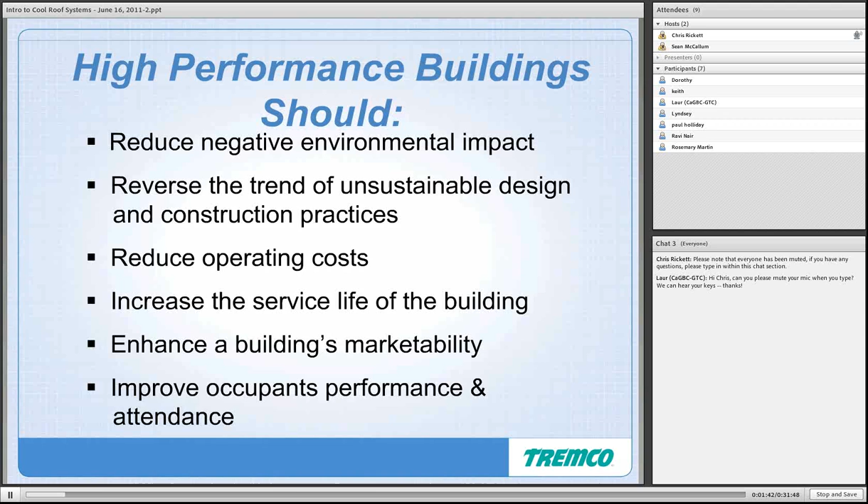So we're talking about high-performance buildings. What should a high-performance building do? High-performance buildings should reduce negative environmental impact, reverse the trend of unsustainable design and construction practices, reduce operating costs, increase the service life of the building, enhance the building's marketability, and improve occupants' performance and attendance. That's what we're looking to achieve when we try to make a building a high-performance building.

Again, talking about the high-performance building, these are some of the elements of the building envelope we try to address when transforming a building into a high-performance building: HVAC, air control and interior air movement systems, vegetated roofing, the air barrier system to improve air quality, glazing transition systems for efficiency, daylighting.

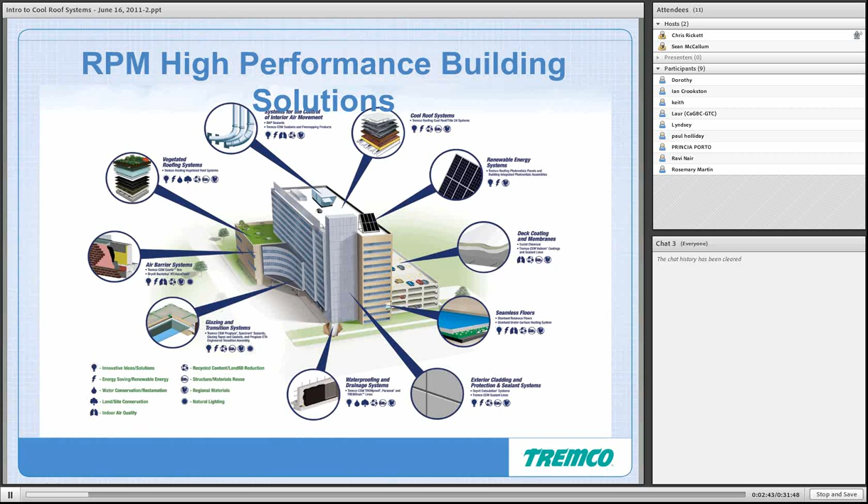Obviously waterproofing, drainage systems, exterior cladding for insulating the exterior of the building, seamless floors - I'll be honest, I don't know a whole lot about that, not my specialty - but deck coatings and membranes, again for waterproofing purposes to improve the durability and longevity of the building. Renewable energy systems - I know Tremco Roofing and Building Maintenance does a whole lot of work with rooftop solar PV. And then finally, cool roof systems, which is what we're here to discuss today.

So the RPM Building Solutions Group - Tremco is one of the companies, part of this larger group of companies called the RPM Building Solutions Group, which encompasses Tremco Roofing and Building Maintenance, Tremco Commercial Sealants and Waterproofing, CanAm Building Envelope, Euclid Chemical, which specializes in additives for concrete products, and Dryvit Systems, which specializes in exterior cladding insulating systems.

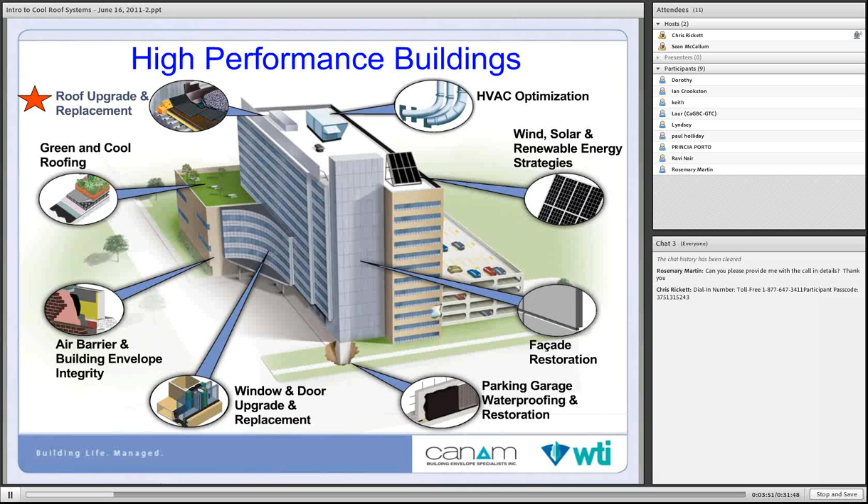So again, talking about the high-performance building, what we're here to talk about today is the roof, and in particular, cool roofing systems.

Just some quick roofing facts for you: roofing represents less than 10% of the cost of any building, but it is an issue in roughly 80% of all construction litigation and 10% of all professional liability claims.

For the most part, most people don't think of the roof until it's leaking, usually on their desk - that's the first thought they give to the roof. But it should be noted that it's a vital component of the building envelope, as evidenced by the fact that it's a factor in 80% of construction litigation claims. So the roof is often out of sight, out of mind, but we're trying to keep it in the forefront of our minds as we move forward.

I'm going to take you through the various roof system types, the most common system types available in the marketplace here in Ontario. The first being single-ply roof systems - these are your EPDMs, PVCs, TPOs, TPAs. Usually a very low initial cost to quick installation.

There are some problems with ply redundancy when it comes to installing these systems, because you do just have the one waterproofing layer, so they are not abuse tolerant. And again, with just the one waterproofing layer, we don't see those layers of waterproofing that we would ideally like to see in a more robust system. There are also problems with the seams.

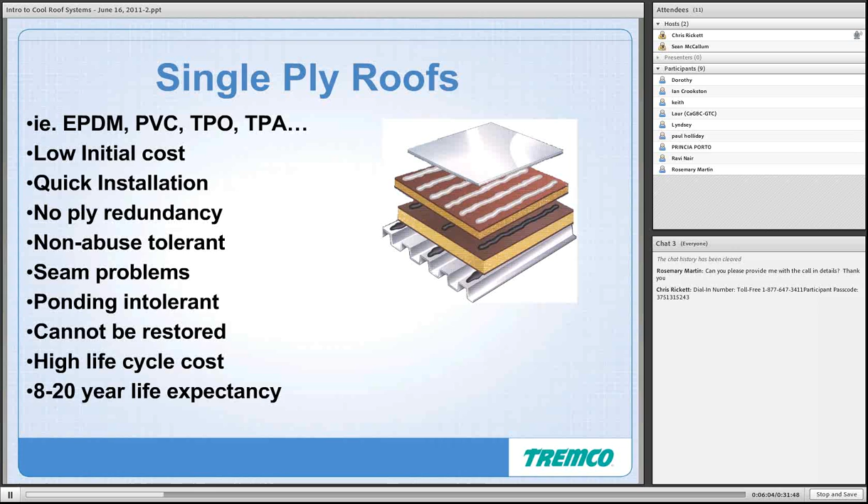I believe my phone is having some issues right now. Let me see here, I'm just going to go on to the next slide, and there's a good chance the battery on this phone is going to die as we move forward.

With the 2-ply mod bit system, we see two plies of redundancy. So where the single ply had one ply of redundancy for waterproofing, the mod bit system does have 2 plies, a little more robust system. We've got usually a factory surfacing on the top ply. Because there are 2 plies of waterproofing with the factory surfacing, you do have a little more resistance to abuse and foot traffic than you would with a single ply. The 2-ply system is maintainable.

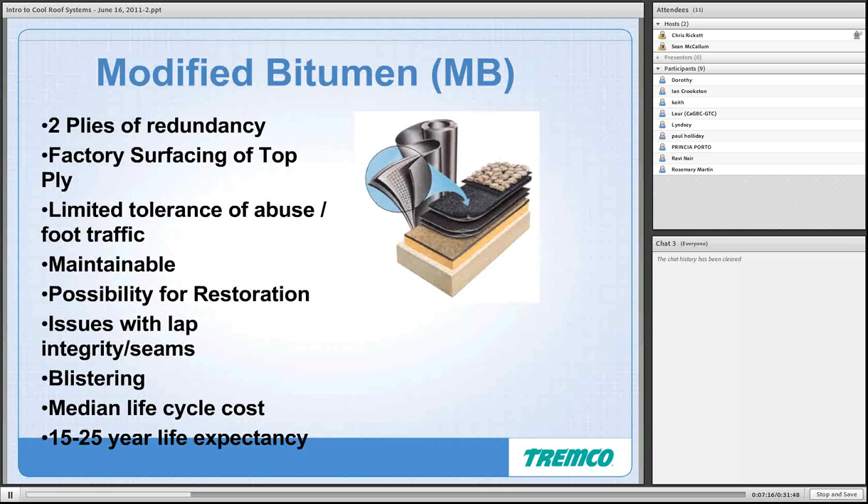There is possibility for restoration, usually involving an upgrading of the top pour, a new flood coat, and the seams. There are issues with lap integrity in the seams, similar to a single ply, because these systems are rolled out. You do have some blistering, usually a matter related to the installation. The 2-ply mod bit system generally has a median life cycle cost, and they do last generally in the neighborhood of 15 to 25 years.

The next system we'll talk about is the built-up roof system. This is your traditional kind of asphalt and gravel system, generally 3 to 4 plies of waterproofing redundancy. There is a true waterproofing element with the interply asphalt between the plies. The built-up roof system is highly maintainable, very easy to maintain, great possibility for restoration, again redoing the flashings and putting on a new top pour and flood coat. These systems with the aggregate embedded into the top pour are extremely tolerant to abuse and foot traffic, so generally not a problem with foot traffic and abuse on the roof.

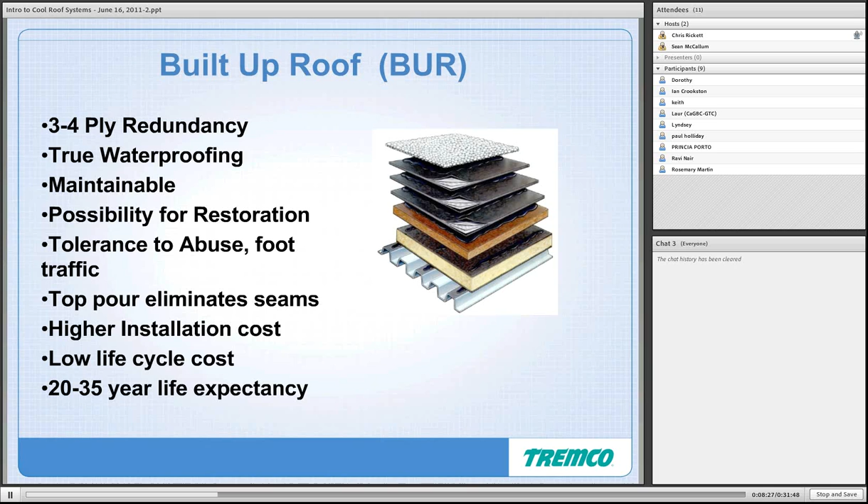The top pour eliminates any seams, the types of seams that you see in single-ply and 2-ply mod bit systems. So you do have a fluid type top pour for waterproofing purposes on the top ply of the roof system. Now, because there are 3 or 4 plies of waterproofing redundancy, there is a higher initial installation cost. But we do generally see longer life cycle from a built-up roof, in that 20 to 35 year range, so there is, in fact, a lower life cycle cost associated with the built-up roof.

And then finally, there are a number of hybrid systems available in the marketplace. The one I want to touch upon is an inverted assembly. Whereas traditional roof systems are built up from the deck with insulation and then the waterproofing on top, in an inverted assembly you have the waterproofing directly on the deck, usually concrete, which allows the waterproofing elements to remain on the warm side of the insulation, so you're not exposed to the cold temperatures in the winter.

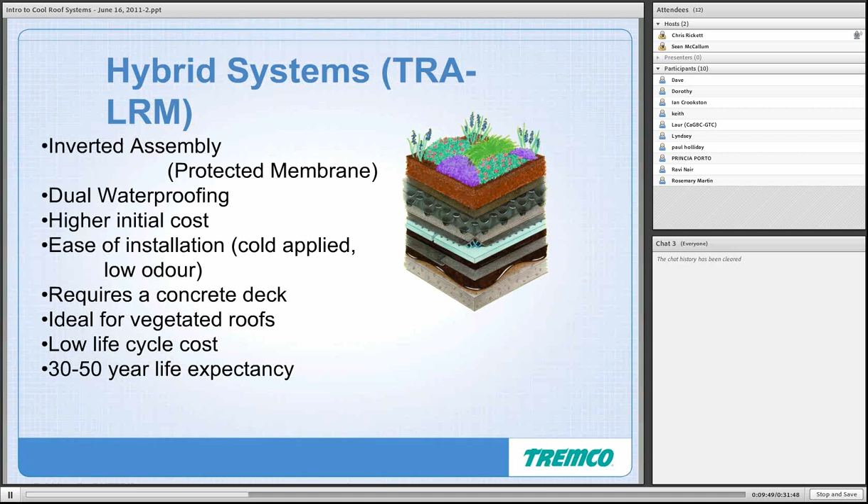This particular system allows for dual waterproofing, usually a fluid applied membrane with a single ply adhered directly into that liquid rubber, and then built up from there with insulation and any type of ballast on top, whether that be a green roof system, patio stones, or river rock. Very easy to install, generally cold applied with low odor. It does require a concrete deck, and is ideal for vegetated roofs. There's a low life cycle cost, despite the higher cost of materials, because it is easy to put down, and you generally see between 30 to 50 years of life expectancy.

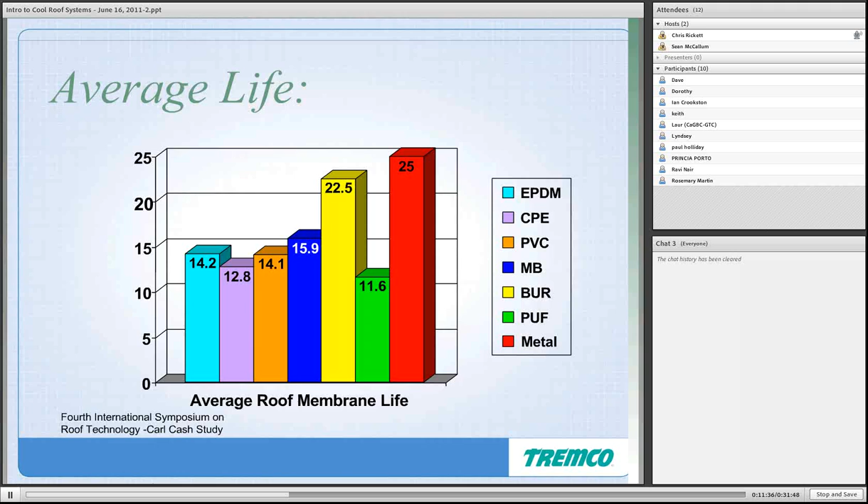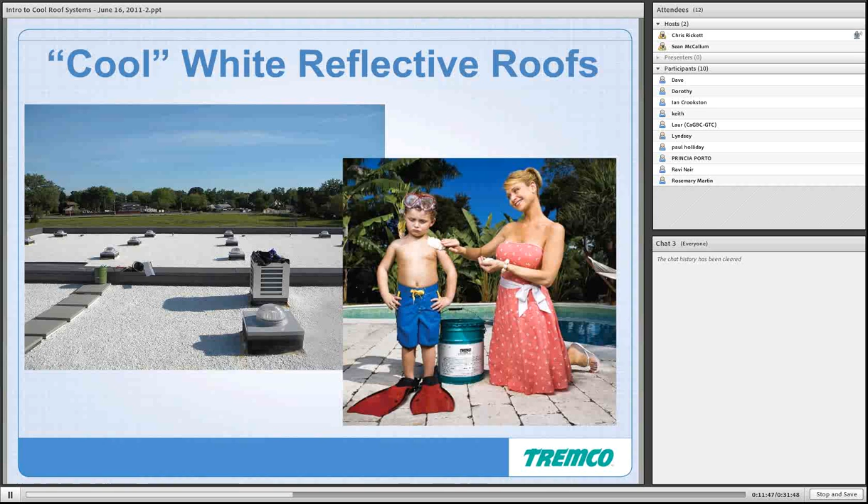You don't have water sitting up there. But I think this slide is very telling because you can see all of those single-ply systems have an average life expectancy of less than 15 years, and they don't offer any possibility for restoration. So when we're talking about true sustainability in the roofing industry, we like to talk about durability, and having to put an entire roof system into the landfill after only 15 years is not, in my opinion, true sustainability. So we like to look towards the longer lasting systems like that two-ply mod bit system and the built-up roof system.

So moving on to talk about what we're here to talk about primarily, which is cool white reflective roof systems, and in particular the Tremco Rock-it system, which has been endorsed by the Clinton Climate Initiative. So what are the benefits of white reflective cool roofing? Obviously, reducing the cooling load is the primary benefit.

When you've got a white surface up on the roof, you don't have that heat emanating from the roof system, so you don't have those high surface temperatures that you would customarily see from a black type surface. As a result, you are improving the energy efficiency. You don't have that heat transfer through the building. You also don't have the air intake units up on the roof working as hard as they might be if you have the warm air emanating off of a black surface. So you really are improving the energy efficiency of the building.

Reducing the thermal expansion and contraction of the roof - this is actually a big one when we talk about the longevity and life cycle expectancy of the roof. Dark surfaces heat up to high temperatures during the day, and then they cool off at night. And like anything else, they expand when they're heated up and they contract when they cool down. By minimizing the amount that the roof is heating and cooling, you're reducing that thermal expansion and contraction, which will reduce the wear and tear on the roof, and ideally it will increase the roof longevity.

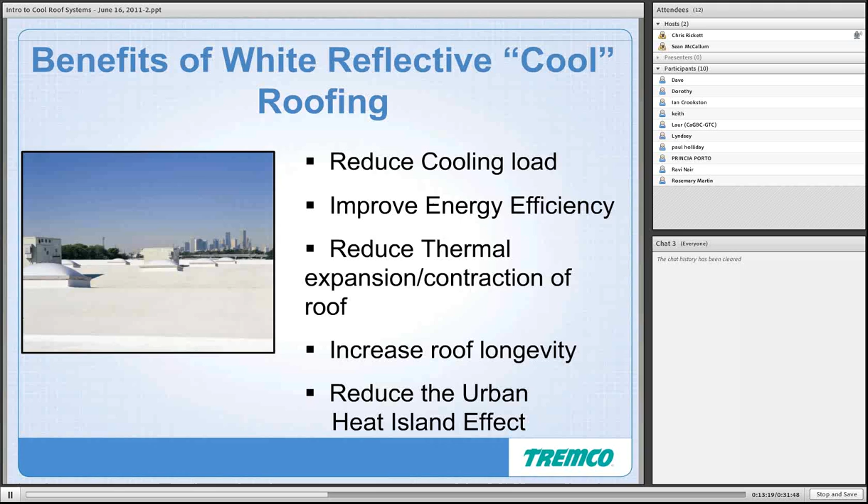And then finally, reducing the urban heat island effect. When you don't have the heat emanating off of these dark surfaces, you are eliminating a lot of that urban heat island effect that heats up the cities that we live in. And I've got a slide a little later on that will show an example of what the urban heat island effect actually does.

This is a quick slide, a result of a study done at the Oak Ridge National Laboratory in Tennessee. This study aimed to show the fluctuation in roof temperatures over the course of a day. These are sample readings from the first month of installation of having these various roof systems installed. If you look at the chart on the left, that black line is an exposed black EPDM roof system, and you can see the massive fluctuation in temperature as the day goes on. The roof surface heats up to over 140 degrees Fahrenheit, and then cools down to below 40 degrees at night - just these massive temperature fluctuations.

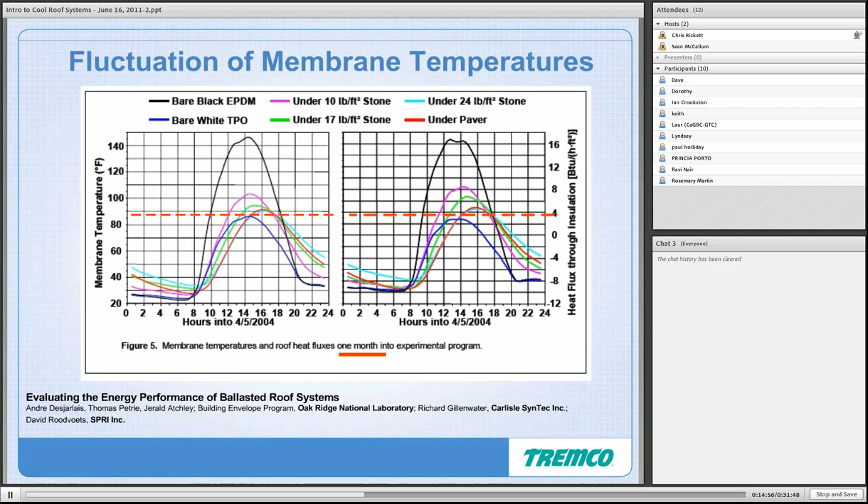The blue line there is a bare white TPO, so that would be a white single ply. You can see it's significantly cooler than the black system, and then the other systems are inverted systems, testing the temperature of the roof surface ballast, whether that be stone or pavers. Now, it's important to note this sample temperature reading was taken after 1 month, and this is a study that was conducted over 3 years. So I will show the follow-up graph as we go on, which shows how these temperatures and these differentials change over time.

These are some temperature readings that we took at the University of Toronto, Scarborough campus, just a day in late August, not overly warm, 27 degrees, sunny day. We had just installed our Rock-it roof system, this white built-up roof system, at the University of Toronto, Scarborough campus. I'm not sure if anyone is familiar with the U of T Scarborough campus, but they kind of have every available roof system, seemingly in the world, on this campus. So we went up there with an infrared thermometer device and just took some temperature readings within the span of 5 or 6 minutes.

As you can see, look at that white Rock-it roof system - the surface temperature being 33 degrees. They had a brand new light gray mod bit system whose reading came in at 42 degrees. They had an old traditional built-up roof system, which is that asphalt and gravel system, came in with a reading of 47 degrees. A brand new dark mod bit system came in at 62 degrees.

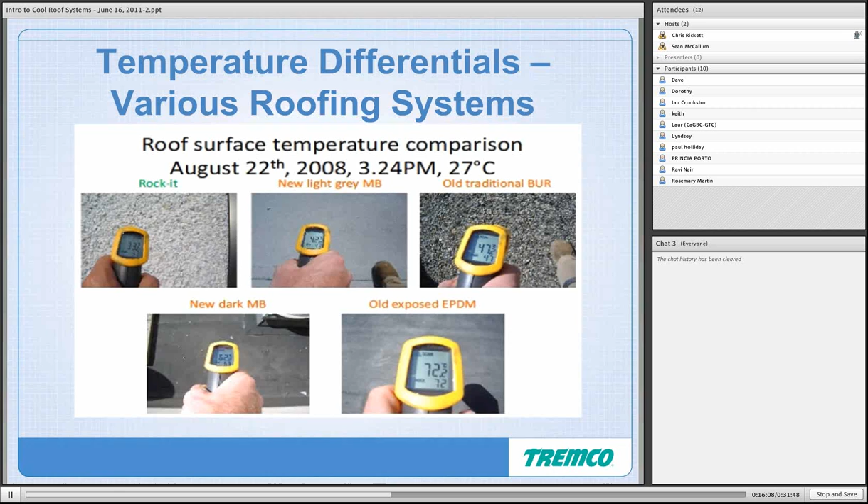And then an old exposed black EPDM system, which came in at 72 degrees Celsius. So, just a massive difference there in the temperature readings on the roof surface at the University of Toronto.

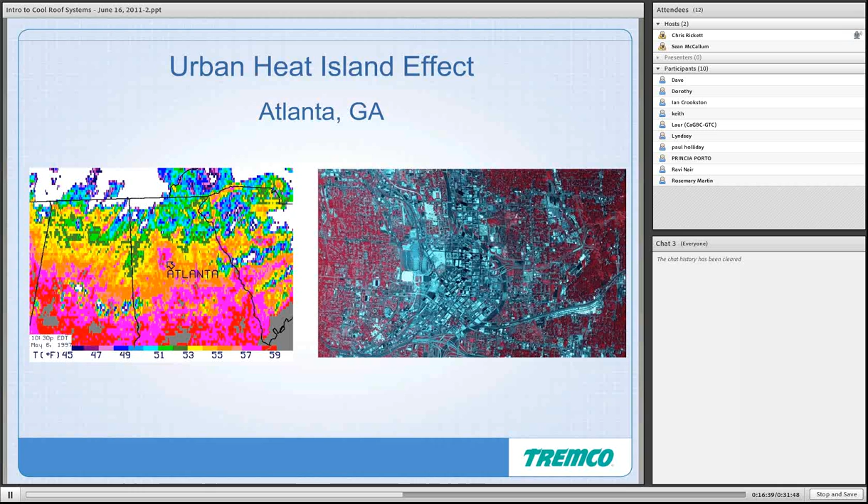As I mentioned, the urban heat island effect—if you look at Atlanta in the chart on the left, they call it an urban heat island. This goes a long way in explaining why it's called an island. It is actually an island of heat in the city of Atlanta. If anyone's been to Atlanta, there's a lot of asphalt, a lot of blacktop, not necessarily a lot of green space. So the result is you've got this warmer climate in this little island of an urban area.

When we talk about white roofs, we want to stress the important considerations with regards to mitigating risk. As the Carl Cash study showed earlier, those single-ply roof systems don't have the type of life expectancy that we'd ideally like to see when we talk sustainability. You really do need to consider the durability of single-ply roof systems lasting anywhere from 8 to 15 years, 20 years at the high end.

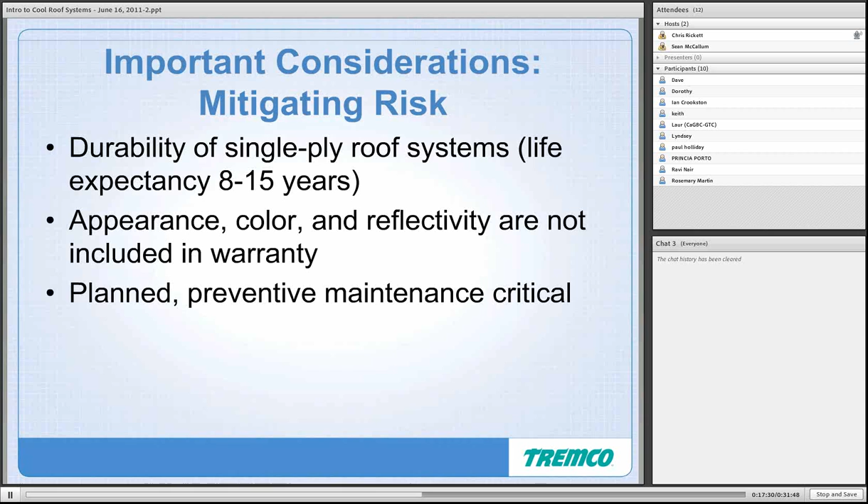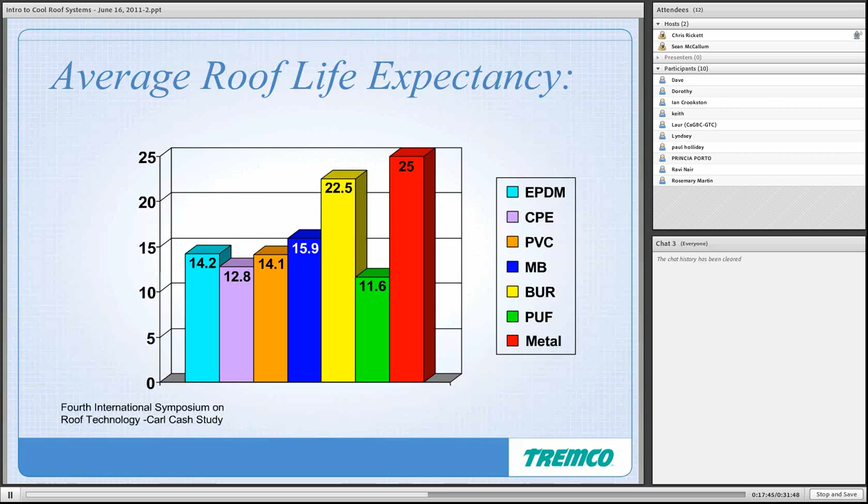Another important consideration is the appearance of the white system—primarily the color, the white color, and the reflectivity are not included in the warranty, and as a result, planned preventive maintenance is critical. I go back to this slide here when we talk about mitigating risk, the importance of the average roof life expectancy in those 3 single-ply systems all coming in at under 15 years. I just want to stress the importance of that.

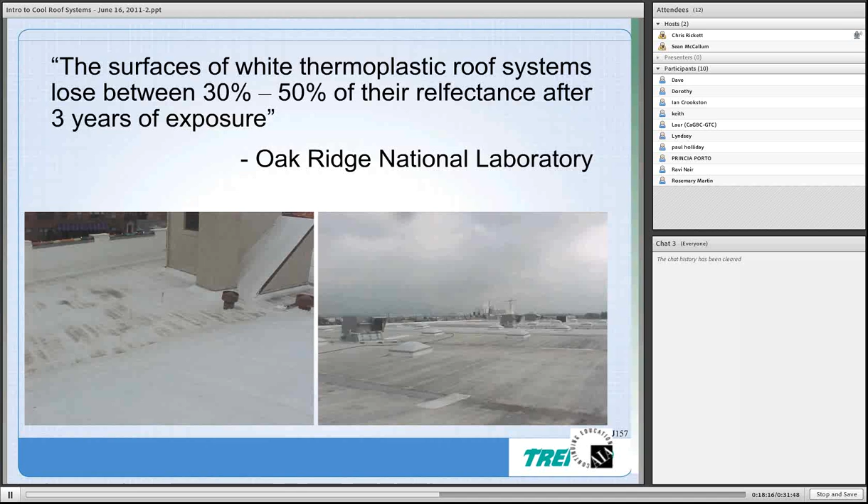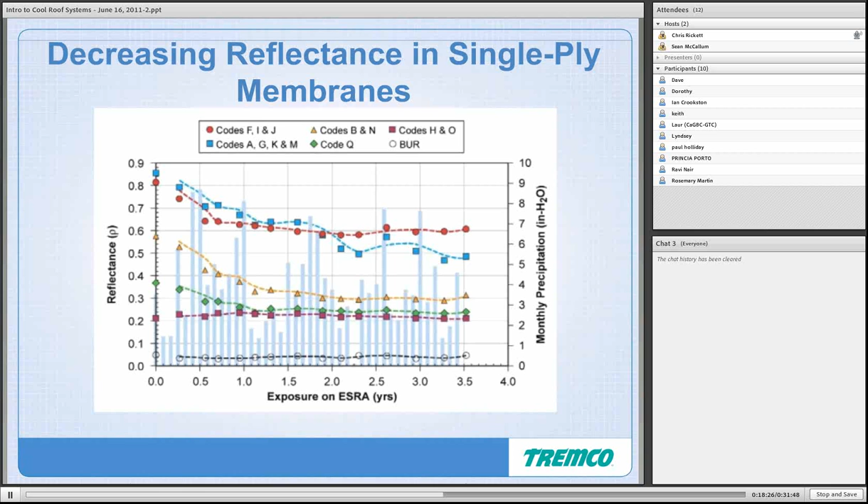Getting back to mitigating risk, this is taken from that same study at the Oak Ridge National Laboratory in Tennessee. Some of the conclusions drawn: the surfaces of white thermoplastic roof systems lose between 30% and 50% of their reflectance after 3 years of exposure. That is very significant. If you're putting down a white system and it's going to be losing up to half of its reflectance within 3 years, these are factors that need to be considered.

And then this, again taken from that same study, is a graph which just highlights the decreasing reflectance of single-ply membranes over time, over the first 3.5 years there.

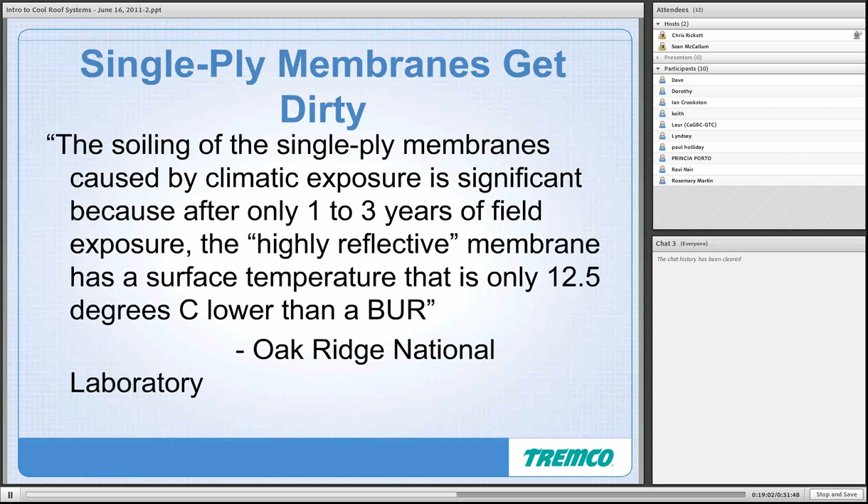So these single-ply membranes, these white surfaces, do get dirty. The soiling of single-ply membranes caused by climatic exposure is significant because after only 1 to 3 years of field exposure, the highly reflective membrane has a surface temperature that is only 12.5 degrees Celsius lower than that of a built-up roof system—and that built-up roof system is up in the high 40s. If you're putting down a white single-ply system because you believe it has cooling properties, after 1 to 3 years it's not all that much lower than a built-up roof system.

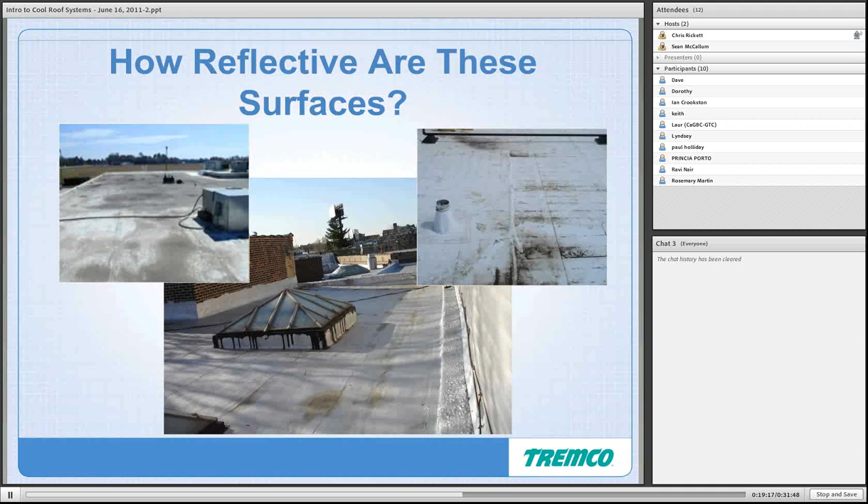Just things to consider, particularly when we factor in the life cycle of a single-ply system. So again, how reflective are these surfaces? You can see these white single-ply systems and judge for yourself how white and how reflective and how cool they are. This is one of my favorite quotes from the study regarding the white single-plies.

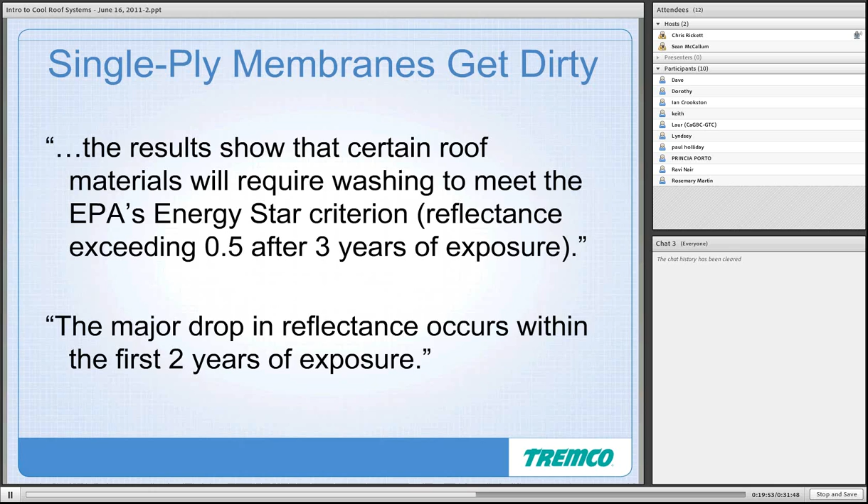The results show that certain roof materials will require washing to meet the EPA's Energy Star criteria—reflectance exceeding 0.5 after 3 years of exposure. To me, I can't really think of anything less sustainable than having to get up on your roof and spray it with clean chlorinated water just to get it clean enough to meet that severe Energy Star criterion. And again, the major drop in reflectance usually occurs within the first 2 years of exposure.

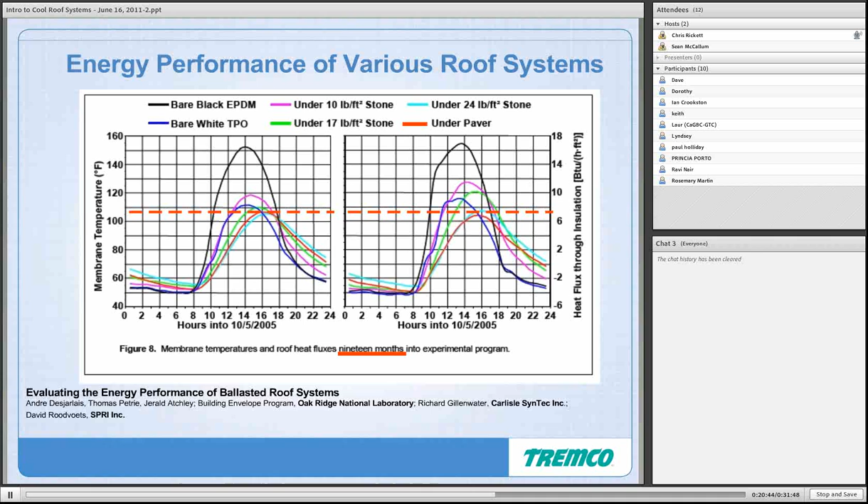After a year and a half, you can see that there are 3 inverted systems underneath the stone that actually come in at cooler temperatures than the white TPO. So that just echoes the idea of the roof system getting dirty within the first 1 to 3 years and being less reflective than something as simple as a paving stone, which you can see came in at a temperature lower than that white single-ply membrane.

So what is the answer to this type of conundrum, where you've got these white single-ply systems that don't last as long as they should, and that get dirty, and that lose 30 to 50% of their reflectance within the first 3 years?

To us, the answer was to create a white built-up roof, because the built-up roof gives you that long life cycle and durability. And if you could get the surface of that system to be white, then you'd have an answer to that problem.

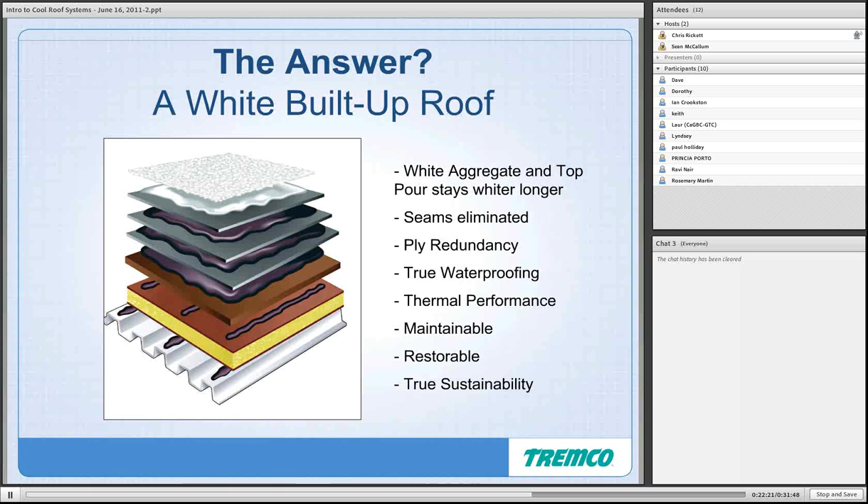Being a built-up roof, you've got that top pour, which eliminates any seam problems you'd get in a single-ply system. You do have that ply redundancy, whether it's a 3-ply, 4-ply, or 5-ply built-up roof with the white top pour and white aggregate. Again, the 3 or 4 plies offer true waterproofing, with the thermal performance coming from the insulation. The built-up roof system is highly maintainable, easily restorable, and factored in with the white surface, redundancy, life cycle and durability, it offers what we consider to be true sustainability.

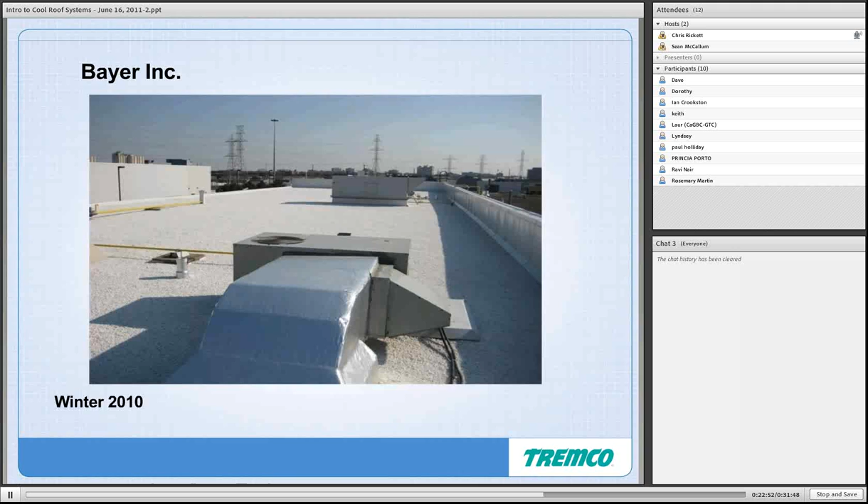This is part of the Project Green Bayer. Locally here, this roof was installed last year in the winter of 2010. Brilliantly white, highly reflective. This is a system that should be in place at Bayer for many years to come.

Moving on, Ennisclare Centre in Oakville. This was about a 140,000 square foot job we did. Interesting story - there's a kind of high-end condo not far from the Ennisclare Centre, and between that condo and Lake Ontario is this building with the white reflective surface.

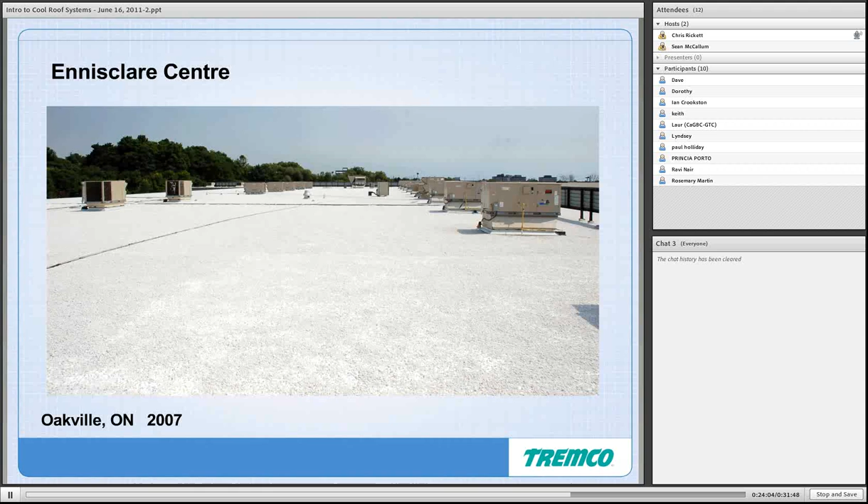Shortly after we'd done this installation, the condo corporation actually filed a complaint with the Ennisclare Centre, saying the roof was so bright and the reflectance so much that it was obscuring their view of the lake. We were hoping we could get that somehow in writing, because it's pretty amazing the roof surface could be that reflective that the glare would obscure their view. So, pretty amazing project there at the Ennisclare Centre.

This is Toronto Community Housing, their head office at Yonge and St. Clair in Toronto. They've actually installed a 10 kilowatt photovoltaic system up on this rocket roof system. It's important to note that one of the benefits of having this white reflective system under a solar PV array is that the panels are actually more efficient when the backside is kept cool as opposed to hot.

So having this white reflective roof surfacing system beneath the solar PV array will help keep those panels efficient - a nice complementing piece of the solar puzzle there.

Some of the other significant rocket roofing jobs we've done here in the GTA include the Bank of Montreal, Royal Bank of Canada, and the Toronto Transit Commission, which actually has the rocket system as their spec - any re-roofing job they do from now on goes with this particular rocket roofing system. The Union Station revitalization and renovation project has a huge green roof, also by Tremco, and the remaining roof is rocket. The City of Toronto has done a number of installations.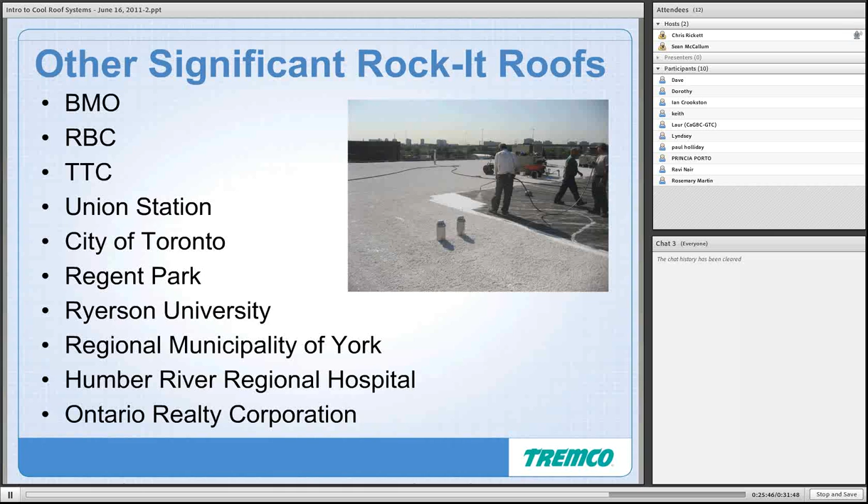The Regent Park redevelopment - I know the aquatic center there, which is kind of the center of that redevelopment project, has got this Rock-It roof system. Ryerson University, the Regional Municipality of York, Humber River Regional Hospital, and the Ontario Realty Corporation, just to name a few locally.

Just to take you through some sample economics of the cost involved in putting the Rock-It system on any roof - I should note this top pour, or white cold-applied top pour with aggregate, can go over either a mod bit 2-ply system or a built-up roof system, and it can go on either a new project, whether new construction or re-roofing, or a restoration project. So if you've got a 10 to 15-year-old roof that needs a little work, one answer might be a restoration project involving the Rock-It roof surfacing system.

So the premium for the Rock-It top pour and aggregate versus straight asphalt - straight asphalt is extremely cheap to put down - so the upgrade premium is anywhere from $2.50 to $3 per square foot.

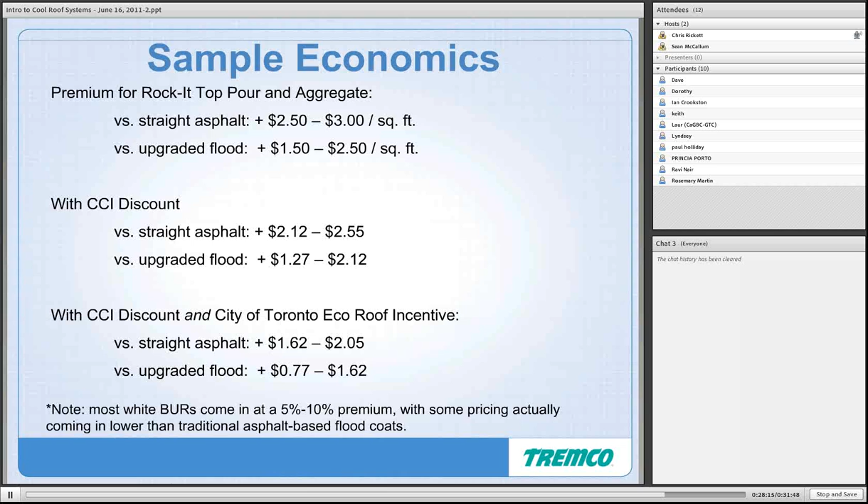I guess a safe rule of thumb—every project is different, but a safe rule of thumb is to say that most white built-up roofs come in at roughly a 5 to 10% premium, with some pricing actually coming in lower than traditional asphalt-based flood coats. We've actually done some projects where, factoring in the discounts and incentives, you come in cheaper than a traditional built-up roof. So it's worth having the discussion if you're doing a re-roofing project to see where we might be able to find you some money to get this done.

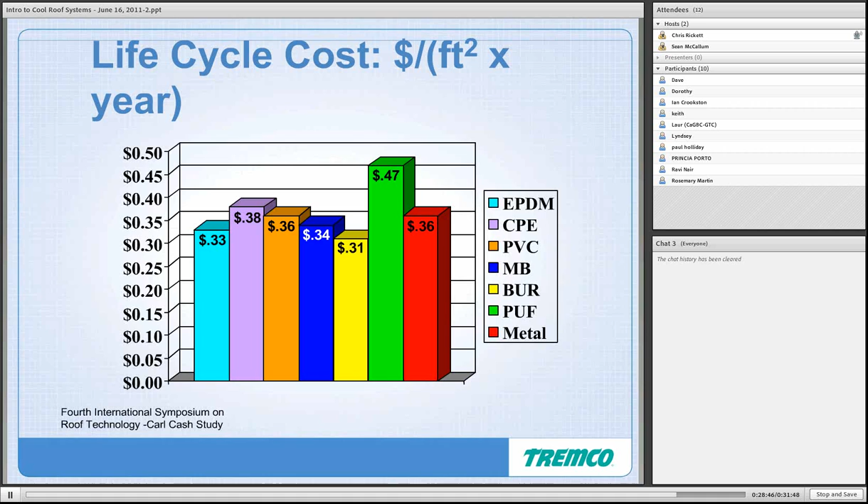We think of mod bit systems and built-up roof systems as being slightly more expensive than the single plies. But when you look at the overall life cycle cost, factoring in the length of time that roof is going to be on your building, these particular systems—the blue and the yellow bar—come in at a lower price than most of the single ply systems. So when we talk sustainability, we want to think about the life of the building and the life of the project.

So what are some of the incentives and programs available for cool roofs? Obviously, what we're here to talk about today—the Clinton Climate Initiative and Partners in Project Green Purchasing Alliance—offers up to a 15% material discount on that cool roof surfacing product. The City of Toronto's Eco Roof Incentive Program offers 50 cents per square foot as an incentive for any cool roof that's put down. And the BOMA Conservation and Demand Management Program, the CDM program, offers $800 per kilowatt in annual energy savings.

I would also highly encourage you to check out the Cool Rexdale program through Partners in Project Green. They're doing some fantastic things in the community, bringing in local youth to work on these roofing projects. It really is an amazing program they have going.

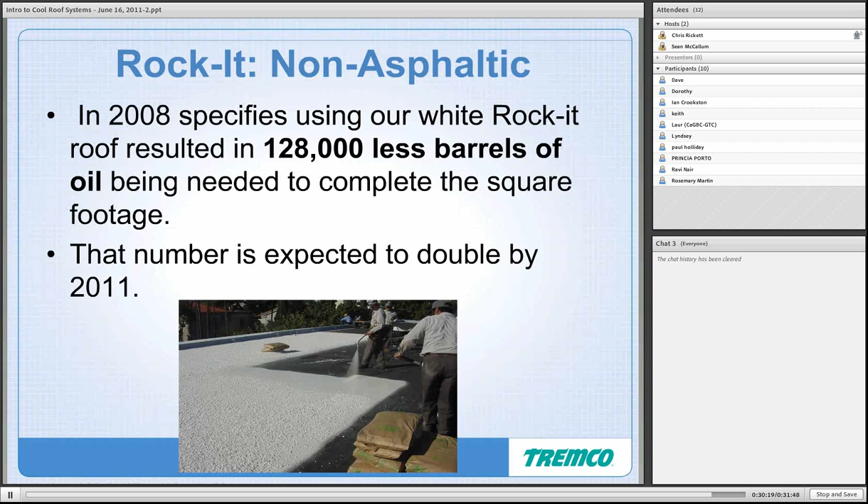So I want to leave you with one final thought here on the cool roof surfacing system. In 2008, specifiers using our white Rock-It roof resulted in 128,000 fewer barrels of oil being needed to complete the square footage. It's quite a significant number, and we expect that number to double in 2011, because we are putting a great deal more of the cool roof system down than we were in 2008. So aside from saving you money and giving you a better roof system, we're actually using a lot less oil. It's kind of a feel-good story using this system.

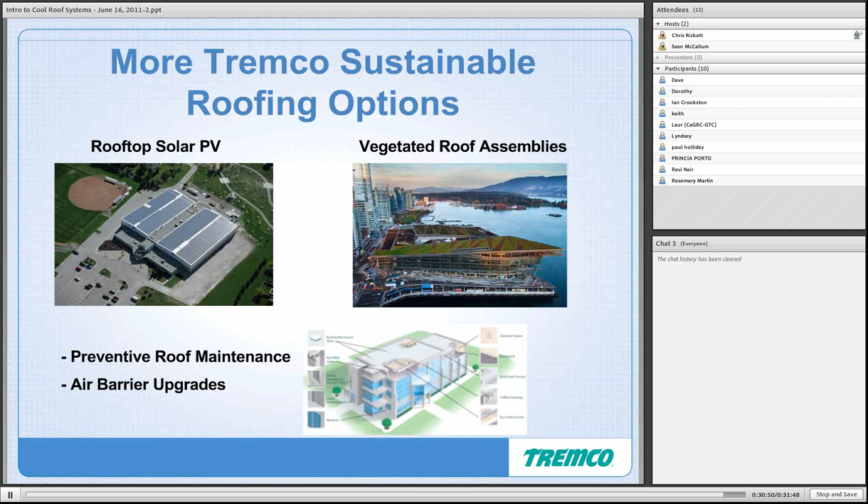Just to touch on a few more of the sustainable roofing options we do here at Tremco: we've done a lot of work with rooftop solar PV here in Ontario. For these assemblies, we've put down over 1 million square feet here in Canada—more than any other roofing manufacturer in North America. So just some other options to think about.

We also offer a whole range of preventive roof maintenance items, as well as interior air barrier upgrades for energy savings.